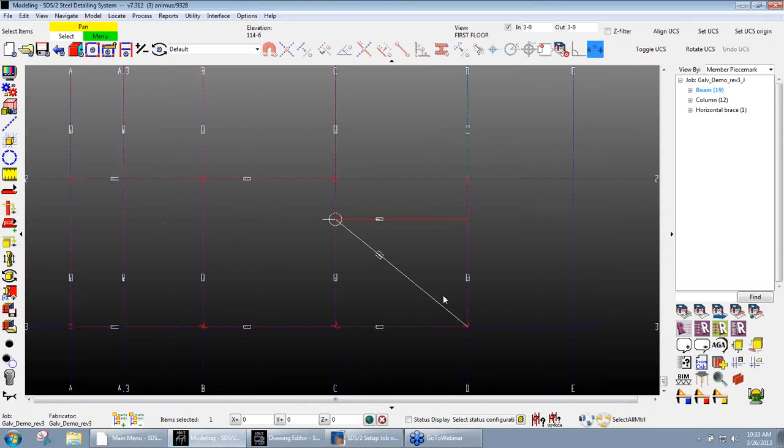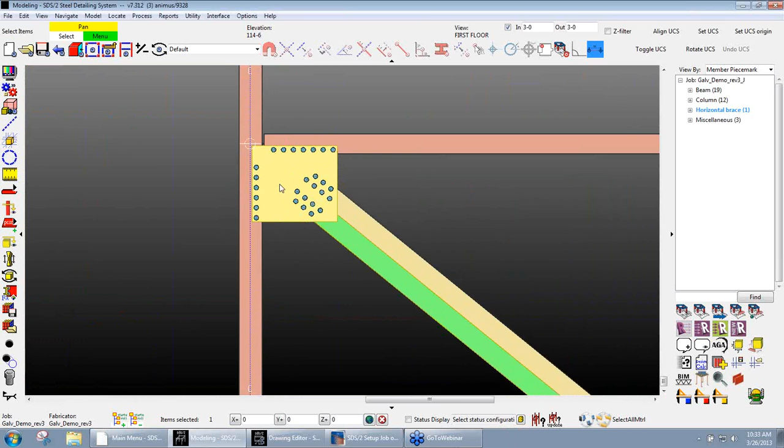So inside of modeling here on my horizontal brace, when I mark it to be galvanized, it automatically checks the break apart. So now the member is still together, but it has separate marks. So here we have a M61, so it can be put back as one piece after galvanizing.

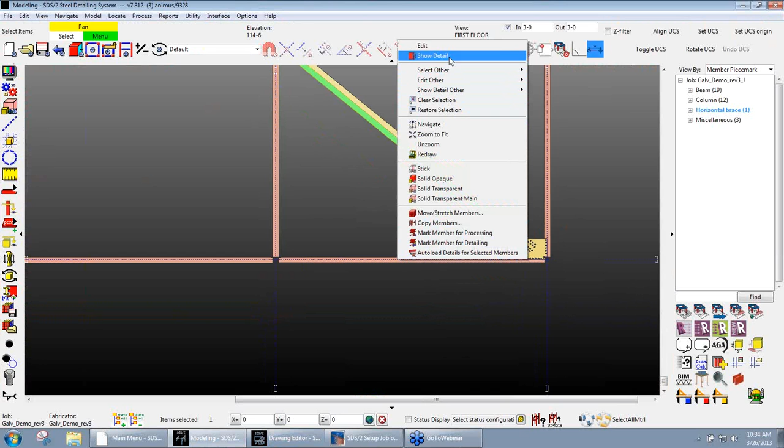Then we have our default surface finish. This can be set to galvanized or duplex coating. This can also be changed in the model on a member by member basis. So if we edit the material of this member, since it is marked for galvanized, it does say surface finish galvanized. I can also change it to duplex coated if needed.

Next we have our default vent drain hole diameter and the default vent drain hole plug type. Default is set to no plug, but you can also set it to zinc plug, plug weld, aluminum, or epoxy. Handrail plug type can be changed in the modeling, and plug type for base plates can be changed by editing the hole.

We have the option to add galvanized duplex coating label to remarks column in the bill of material and add no chromate quench note to detail for duplex coated members. So when the member is detailed, we have a member here that is galvanized. So when we look at the bill of material in the remarks column, we have a galvanized note.

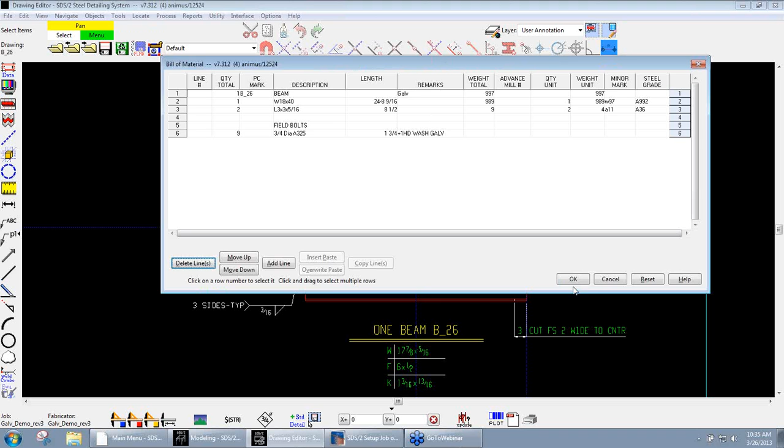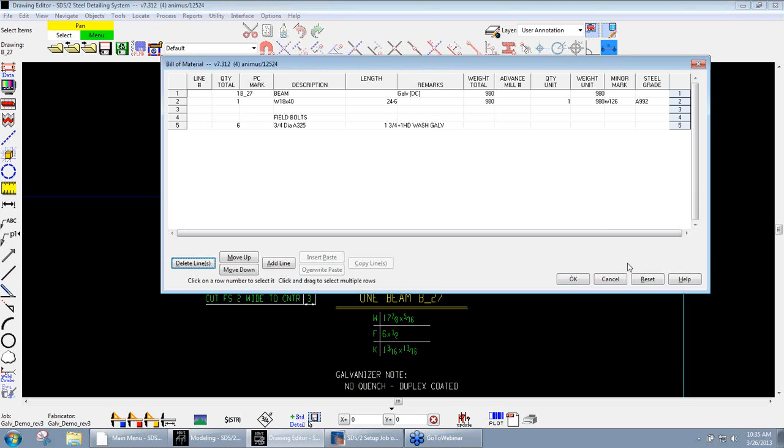And we have a member here that is duplex coating. So we have a galvanizer note, no quench, duplex coated. And if we look at the bill of material on this member, under remarks we have galvanized, duplex coated. That is it for galvanizing options.

Inside of the plate definition schedule, now under the More button, there is a drain vent hole option. There are currently 7 patterns for pipe, 4 patterns for the HSS tube, and 2 for wide flange. There can only be 1 pattern per plate. After you select the pattern, there are plate settings and a place to select or type in the section size. When the section size is selected, the properties are displayed, which allows for the proper amount of vent drain to be designed.

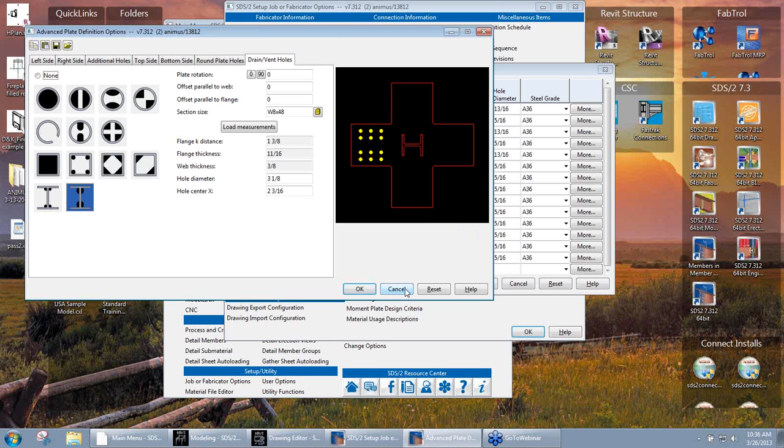Inside of the model, when we edit a member, there is now the Galvanized checkbox. When this box is checked, the member gets marked for processing. The Process and Create Solids applies the galvanizing setup and properties to the member and material.

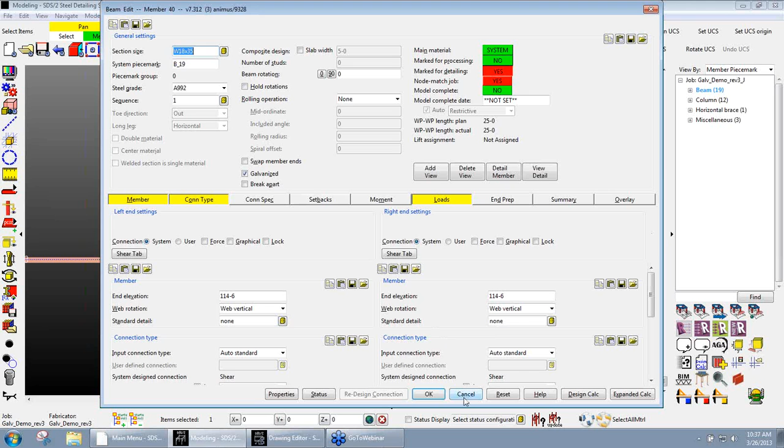We also have automated handrail vents and drains. So inside of this handrail, it is marked galvanized, and we have galvanized vents. So when a handrail is added to the 3D model and is marked as galvanized, SDS2 automatically adds all the required vent and drain holes per the AGA's design guide for galvanized steel structures.

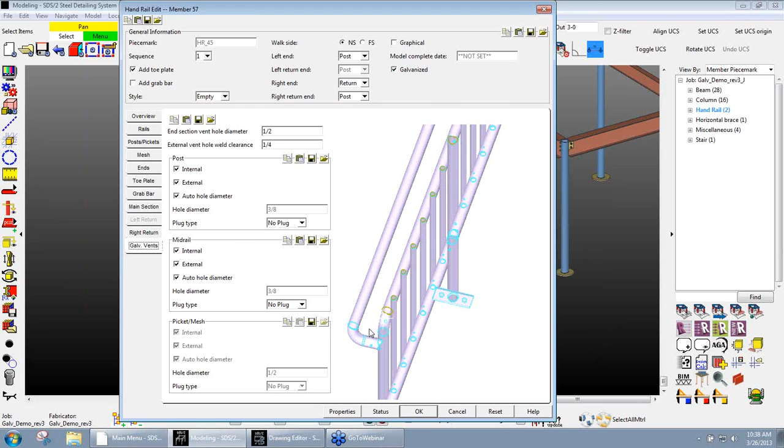Both internally and externally venting are options. So we see here for the post we have internal, external. And if we take a look at this handrail, we can see that the vent drain holes are located in here.

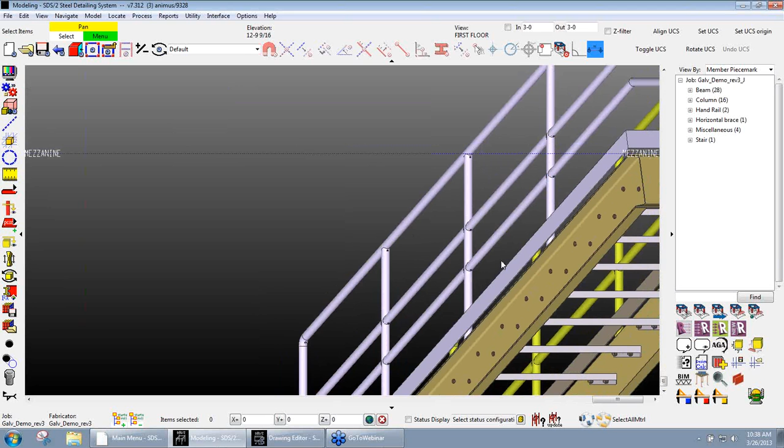Galvanizing is also included now in special masking options. So when going to detail members, we can go to the Hide option, and under Category and Miscellaneous, we have a checkbox to hide galvanized members.

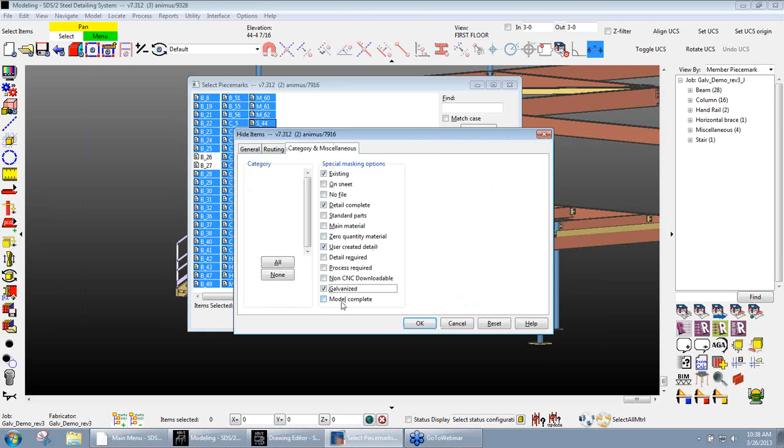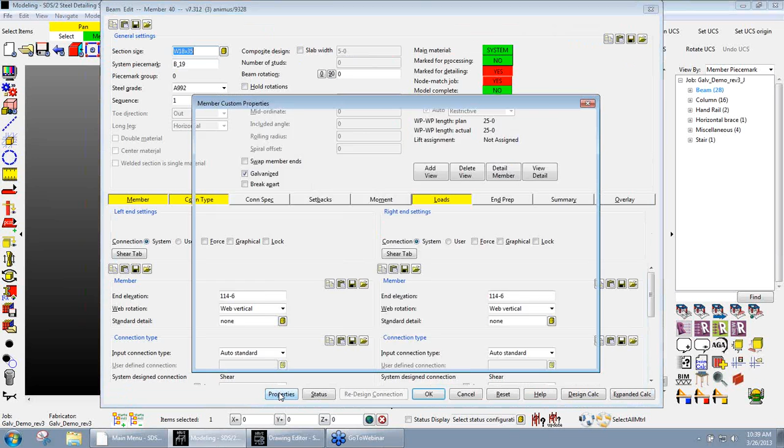There are also custom properties for galvanizing. So when editing a member, and then go to the Properties, underneath the Fabricator tab, there is a Sent to Galvanizer, Galvanized Date, and Receive from Galvanizer option. Custom Selection now also contains galvanized and duplex coated.

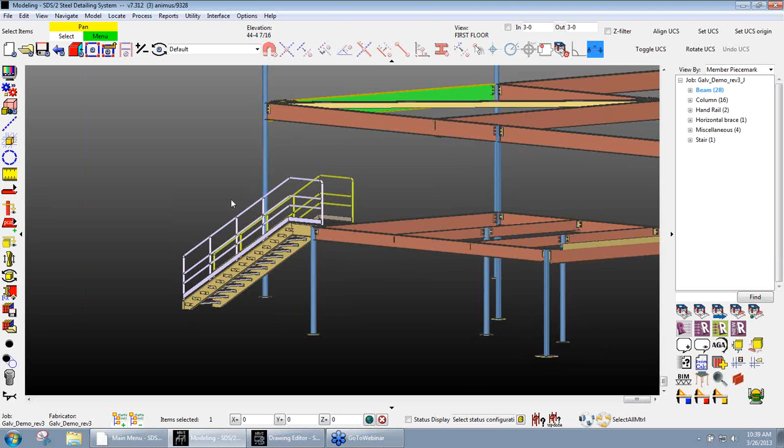Status display can be used to show which members are marked as galvanized. And this would be located under Modify Condition, Member Status, and Galvanized. Okay, so that would let you know which members in the model are marked as galvanized and which ones are not.

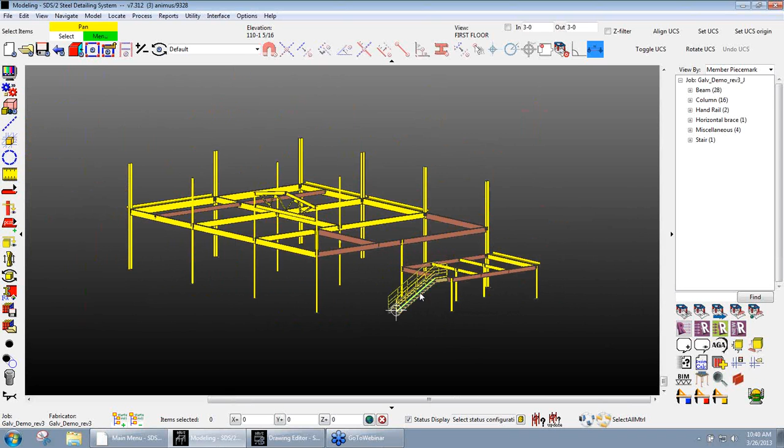And that leads us to the check tool. Over here we have the AGA Check Tool. Now when you select the AGA Check Tool, it's going to ask you to locate members to run check on. You can select everything. This will only look at the members that are marked as galvanized and only check those. Inside the check tool, you can run as many checks at one time as needed.

The check tool refers back to setup and has the ability to check members marked as galvanized for the kettle tank fit, conflicting material thickness, proper vents and drains, proper use of galvanized fasteners, the kettle crane capacity, proper use of seal and stagger welds, and ungalvanized material. Proper use of seal and stagger welds and ungalvanized material thickness are still under development, and as of now only report a general message.

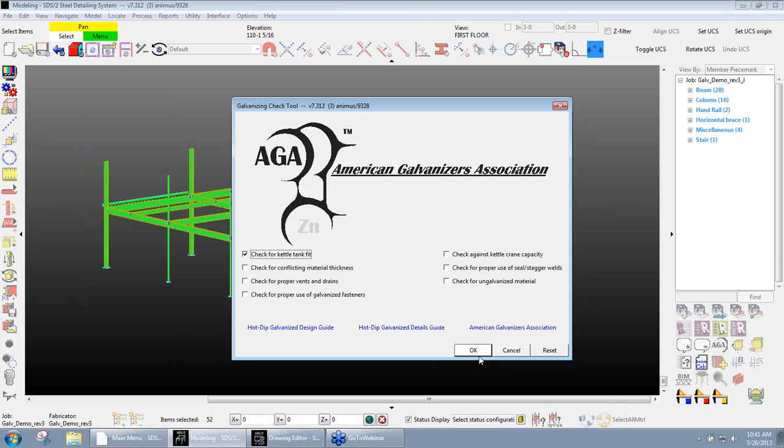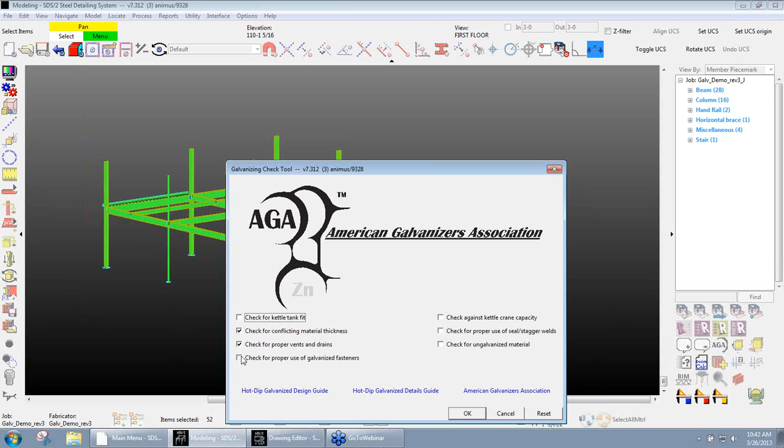So for example, if we run a check for kettle tank fit, it will give an output request summary and let you know which ones pass kettle tank fit, and if there were members that do not, it would also come up with that as well. I'm going to run the rest of the checks here. And it puts it all into one large output request summary.

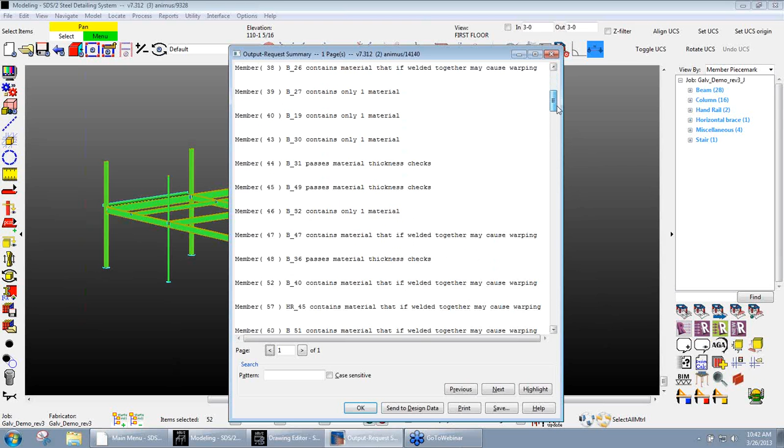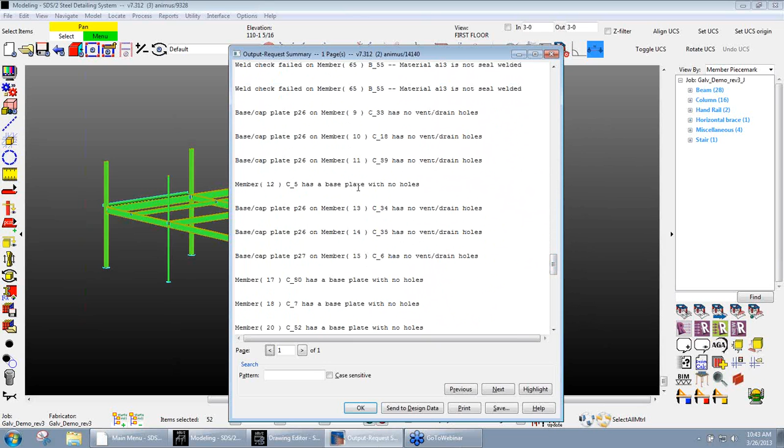So here's the general message here that comes up. We have the C18 contains material that if welded together may cause warping. So it's just a general message there. Also the general message, it is not seal welded. It will let you know when you have a base plate that has no holes or no vent drain holes, if the member passes the crane capacity, and if a member is connected to non-galvanized members.

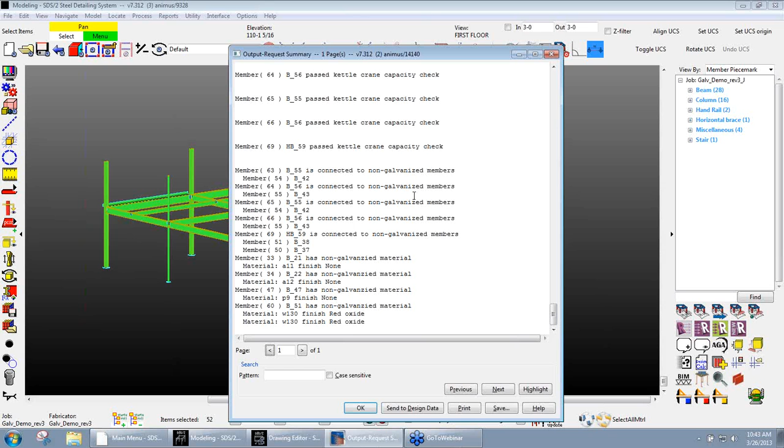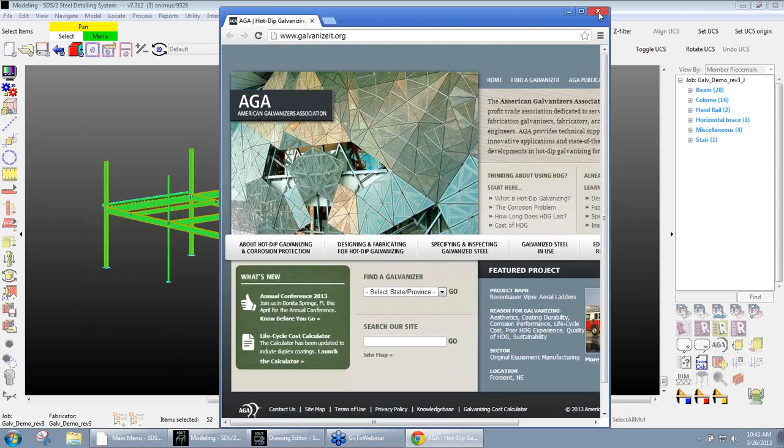Also inside the check tool, you'll see that there are 3 links down at the bottom. These links take you to online guides. For example here, this one will take you to the American Galvanizers Association website. And this just lets you know what the guidelines are that are being followed when this check tool is being ran.

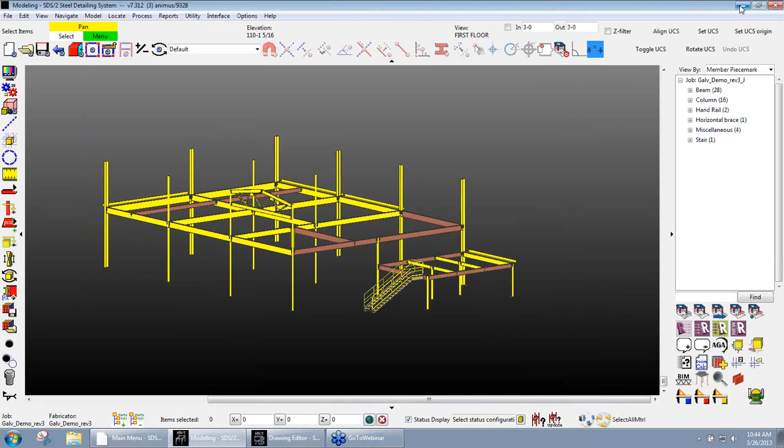If we run that, it just looks at all the galvanized members, and it will give you the sequence, quantity, piece mark, section size, the length, the weight, and the surface finish. And then the totals at the bottom.